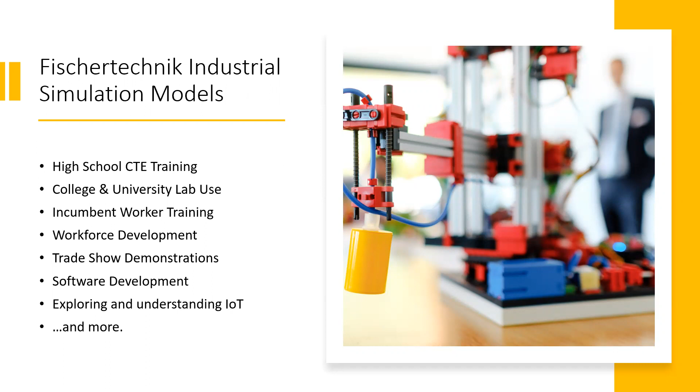Now, whether you're an educator at the high school level, let's say involved in something like CTE training, if you're maybe a college professor or an industrial trainer, teaching programming skills required in manufacturing, maybe you're with a company looking for ways to demonstrate your software-based solutions, or you're just looking for ways to make IoT-related concepts easier to understand to employees or customers. In any of these instances, I believe this presentation is going to offer some important options for you to consider.

And we're going to start off by considering the skills gap. Now, if you've attended any of our other Fischertechnik education webinars, you've probably heard me talk about the importance of STEM education. And of course, STEM's an acronym which stands for science, technology, engineering, mathematics, and it really goes without saying that STEM education has been perhaps the most discussed topic in education over the last decade.

Now, as most of us are aware, the push for developing STEM skills in students is in large part to help to best prepare them to take their place in the modern workforce. Not so long ago, when our parents or our grandparents were entering the workforce, employers in areas such as manufacturing might have been satisfied with hiring workers who could demonstrate good motor skills and a solid work ethic. But as manufacturing becomes more and more dependent upon automated processes and robotic control, employers now desperately need individuals who have a background in areas such as mechatronics, industrial electricity, mechanical components, and programming PLCs.

And as it ties in directly with the solutions we're going to be looking at in this presentation, I'm going to stop and consider that last skill area that I just touched upon, that of being a PLC programmer. First off, in case you're not familiar, PLC is an acronym, the letters of which stand for Programmable Logic Controller. And essentially, a programmable logic controller, or a PLC, is a very specialized computer that's used to control the types of machines and automated processes that are typically found in an industrial setting. And these are, of course, going to be things like an automated manufacturing plant, for example.

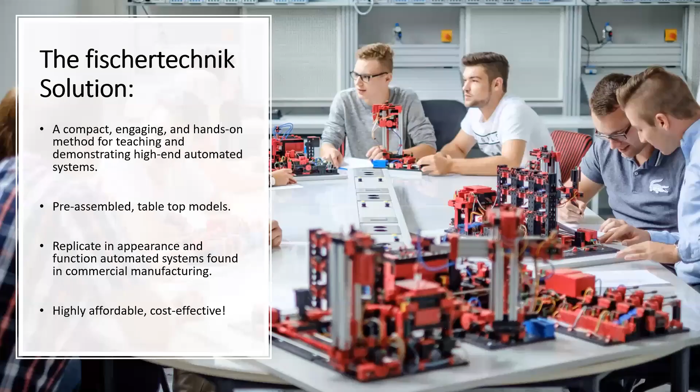And that brings us to the line of Fischertechnik industrial simulation and training models. Now, these models have been designed with the intent of providing a compact, engaging, and hands-on method for teaching and demonstrating high-end automated systems. The line consists of a series of pre-assembled small scale models which are designed to replicate in both appearance and function various automated robotic machines and systems that are commonly found in commercial manufacturing.

So, before we get deeper into the models, let me provide you with a little bit of background on what Fischertechnik is all about. Fischertechnik has been creating tools for teaching students of all ages how technology works for well over 50 years now, based around their unique building system. Now, what makes their building system unique is that unlike other popular construction systems where the components are designed to simply stack, the Fischertechnik system was created with more of an engineering mindset.

The core building block in the system is designed to enable attachment from all six sides, and because of this, it allows for almost limitless design possibilities. Many of the parts are designed to slide together and lock in place using a tongue and groove assembly method. And the hundreds of different parts available will also help to address very specific design needs.

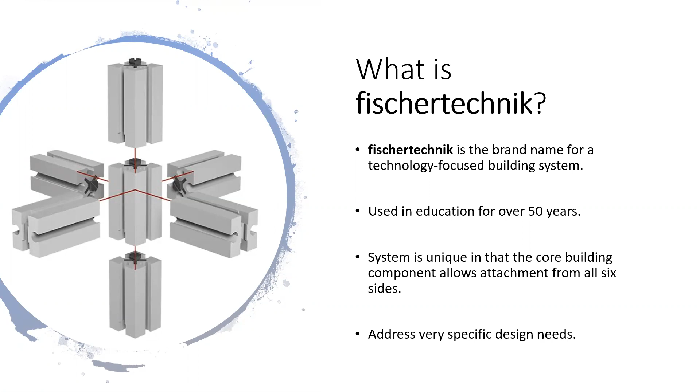The system was created back in the 1960s by German inventor Arthur Fischer, who's noted for countless innovations used in both the construction and the automotive industries. Now, Mr. Fischer, at the time of his death back in 2016, held more patents in his name than Thomas Alva Edison had amassed during his own lifetime.

Now, besides Fischertechnik, Mr. Fischer was the inventor of synchronized flash photography, and that was back in 1949. And he's also credited as the creator of the expanding nylon wall plug, which is commonly used in conjunction with a screw or a bolt to help anchor heavy objects to walls.

His company, the Fischer Group, employs thousands of workers worldwide, producing many variations of fastening devices that are used in building construction. And they also produce numerous components that are used in the automobile assembly process, as well as providing consulting services to companies who wish to employ state of the art manufacturing processes.

Now, once again, the focus of Fischertechnik sets, whether those intended for the retail market or those that are designed specifically for classroom use, in either case, the focus has always been on helping to foster an understanding of technology and how things work. Now, many of the products offered by Fischertechnik for the education sector are what we call subject specific sets, focusing on different STEM related areas such as mechanics, pneumatics, robotics, renewable energy, and other such topics.

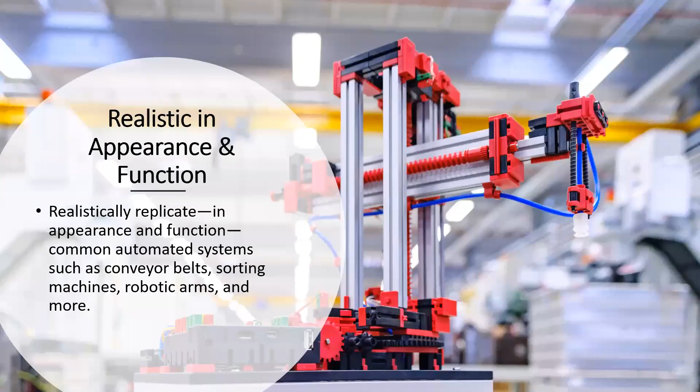First, Fischertechnik simulation solutions allow educators to offer engaging, hands-on tools for teaching, exploring, and understanding various aspects of automation and programming. Now, this could be for understanding how automated systems work, or for having a tangible physical system to observe and work with in a programming or PLC-focused learning environment. The models are also, again, designed to realistically replicate in both appearance and function common automated systems, things such as conveyor belts, sorting machines, robotic arms, and more.

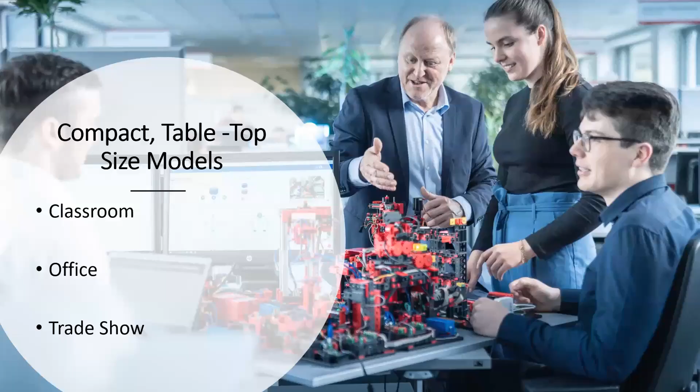Now, because the models are compact, in most cases tabletop sized models, they are not only ideal for use in the classroom or for in-office demonstrations, but also for demonstrating software or other technology-based offerings in a trade show environment. The next factor is quality. Each Fischertechnik simulation model is a hand-assembled, high quality German-made product.

Each of these models is available in a 24-volt version designed specifically for use with industry standard PLCs. Now, it doesn't matter whether you prefer, let's say, Allen Bradley controllers, Siemens controllers, or if you use controllers from manufacturers such as Honeywell, Mitsubishi, General Electric. You could, of course, name many others. You can control the 24-volt versions of the simulation models with the PLC you prefer.

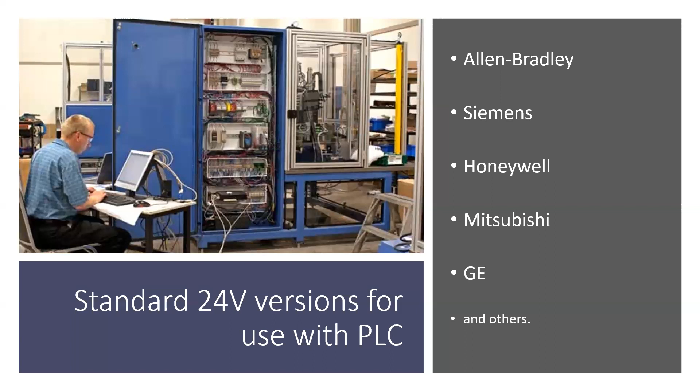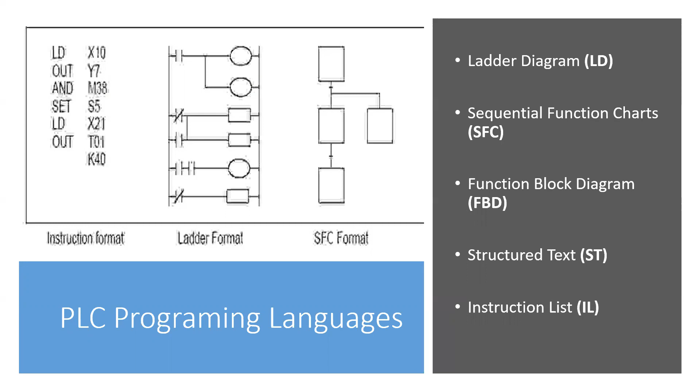But for those who are non-industrial users or for educators who aren't versed in or focusing on PLC programming, there are several models which are available in 9-volt variations. In the case of these 9-volt variations, they ship pre-wired to Fischertechnik's own proprietary robotic controller, which is the Robotics TXT controller. In this case, it's the newly upgraded TXT 4.0. And each of these controllers is pre-programmed using Fischertechnik's own RoboPro graphic programming software.

Now, when we're talking about the 9-volt versions, the only additional component that will be required will be the addition of one or more 9-volt power adapters as specified with each model. Otherwise, in most cases, these 9-volt versions should be ready to use out of the box.

Now, if you're involved in demonstrating or exploring IoT, also known as the Internet of Things, besides the fact that many end users have adapted some of the models in the primary line of simulation and training solutions for IoT purposes, Fischertechnik now also offers a special IoT-focused version of the factory simulation model, which is designed specifically for exploring and understanding cloud control and what is often referred to as Industry 4.0.

Now, in the case of this model, it's designed to be both controlled and monitored from a special web-based dashboard. And we are, of course, going to look at this in more detail a little bit later in the presentation.

Finishing up our advantages, finally, the Fischertechnik simulation models are cost-effective. Now, if you've had the opportunity to look into any of the other hardware-based industrial simulation options that are available in the marketplace, you'll probably notice pretty quickly that the entry point for many of these products can easily be $20,000 to $30,000 or even much more. Fischertechnik simulation solutions, on the other hand, are available at just a fraction of that price, as well as, again, being compact, realistic, and high-quality learning and demonstration tools.

So on that note, we're going to jump right into our review of the models. And we're going to start off with the vacuum gripper robot. Now, what you're going to see in this video is the vacuum gripper being a 3-axis robotic model with a vacuum gripping device. The model you're going to see is designed to precisely pick up and position workpieces in 3-dimensional space. The model itself includes 3 encoder motors, 3 push-button limit switches, a vacuum suction device, a compressor, which is the blue brick component that you see in the video, and a solenoid valve.

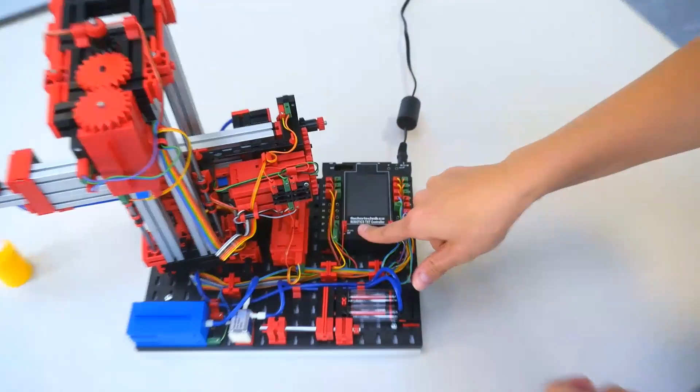The dimensions of the model are approximately 9 by 19 by 15 inches, and it has a weight of only about 7 pounds. The 24-volt version of this model, as well as all of the first 5 24-volt models we're going to be looking at today, each have a relay board for motor polarity reversal and both a multi-pin connector with 34 pins and a grid of 2.54 millimeters, as well as additional PCB terminals with push-in connections for all inputs and outputs.

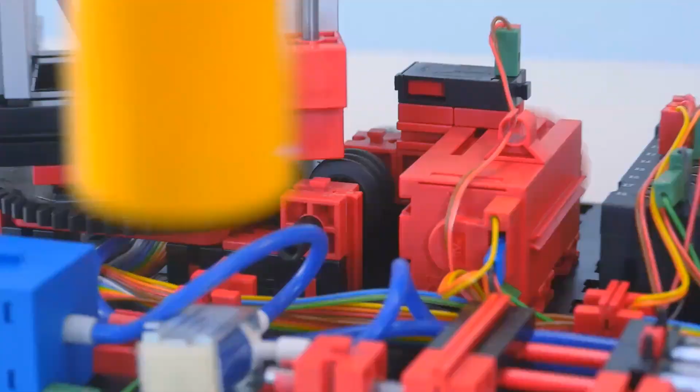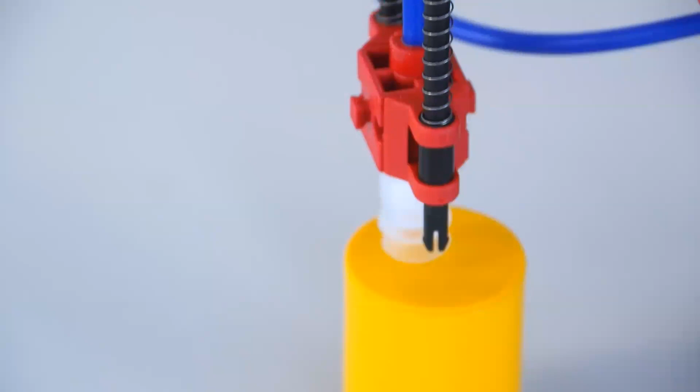Again, this 24-volt model, as with all of the 24-volt versions we're going to look at, will require you, the end user, to provide the PLC and the programming, the wiring from the PLC to the model, and so on. I will also mention that for this and for all of the models we're going to look at today, the specs are also detailed in the product listings found on the Studica website, as well as in our product brochure, which I will provide information on obtaining at the end of this presentation. I'm just going to let this play out for another second or two.

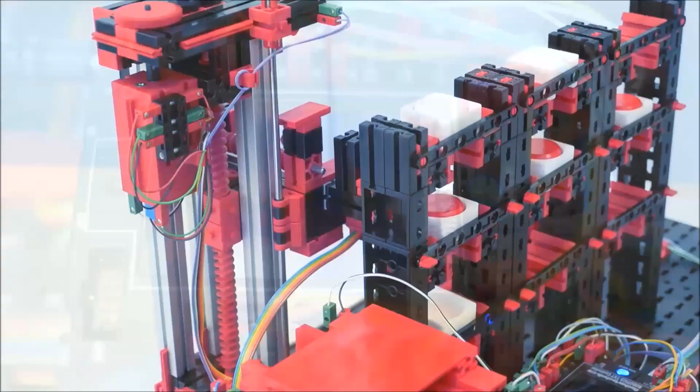And there we go. Next model we're looking at is the automated high bay warehouse. The model you're going to see here features a transfer station with a conveyor belt, along with a shelf stacking mechanism for storing and retrieving workpiece carrier trays, along with 9 individual storage spots. Components on the model include 2 encoder motors, 2 mini motors, 4 push-button limit switches, 2 photo transistors, 2 LED light barriers, and a selection of different colored workpieces along with carrier trays for each piece.

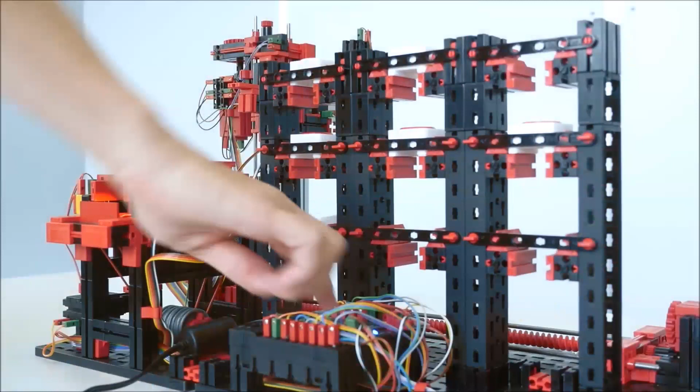I will mention that this particular model is a favorite among educators that I've spoken with who teach programming. And the reason for that is because it gives you a lot to work with in regards to the movements of the picker mechanism, as well as the precision required to properly store and retrieve each of these workpieces, each step of which, of course, requires very specific coding. So because of that, they like the detail that's involved. The dimensions for this model are approximately 19 by 28.5 by 15 inches, and it has a total weight of about 18 pounds.

Again, the 24-volt version has a relay board for motor polarity reversal and both the multi-pin connector with 34 pins and a grid of 2.54 millimeters, as well as additional PCB terminals with push-in connections for all inputs and outputs. Again, you do need to provide your own PLC and programming. And there is a limited edition 9-volt version also available at this time. Again, pre-wired to the pre-programmed TXT controller, and 1 9-volt power adapter is required for that.

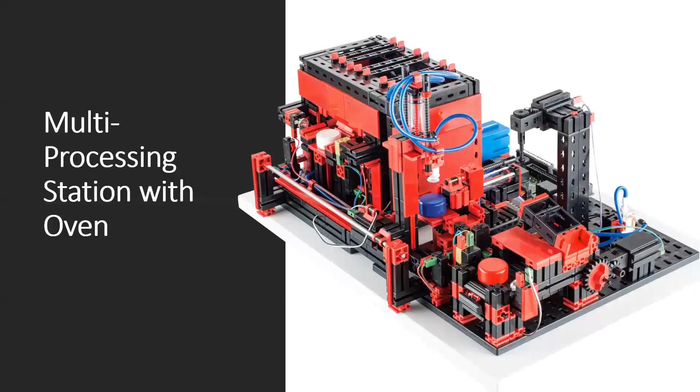The next model we're looking at is the multi-processing station with the oven. And what we're going to see here is a model featuring a furnace simulation with a pneumatic sliding door.

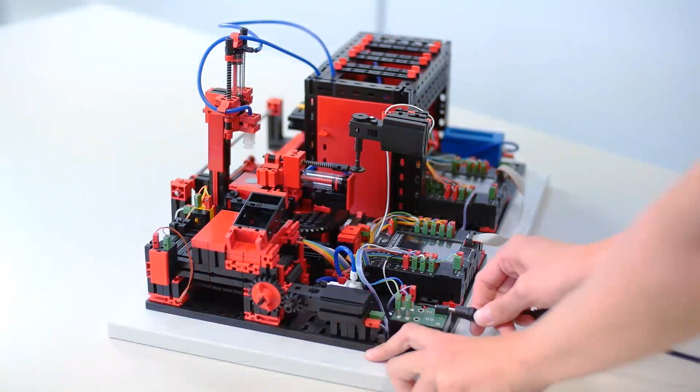There's a downstream processing station with a pneumatic transfer unit that includes a vacuum gripper, a cutter with a rotary table, and a conveyor belt. Components used on this model include 4 mini motors, 6 push-button limit switches, 2 photo transistors, 2 LED light barriers, 4 solenoid valves, and a compressor.

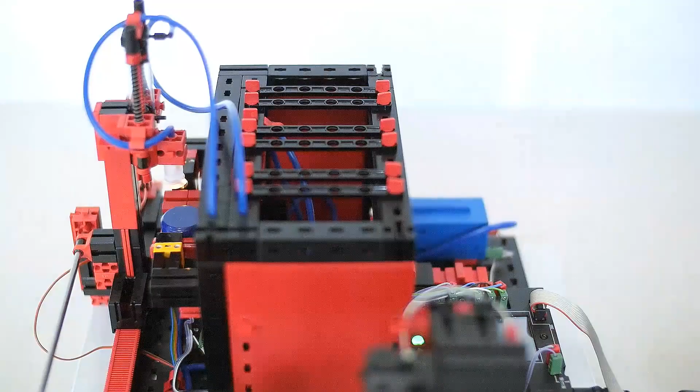The dimensions on the model are approximately 20 by 14 by 12 inches, and it has a weight of just about 11 pounds. And again, the standard version of this model is the 24-volt version for use with the PLC of your choice, with once again a relay board for motor polarity reversal and both a multi-pin connector, again 34 pins with a grid of 2.54 millimeter, as well as additional PCB terminals with push-in connections for all inputs and outputs. And the limited edition 9-volt version in this case is connected to 2 ROBOTICS TXT controllers. So in that case, 2 9-volt power adapters will be required for all operations.

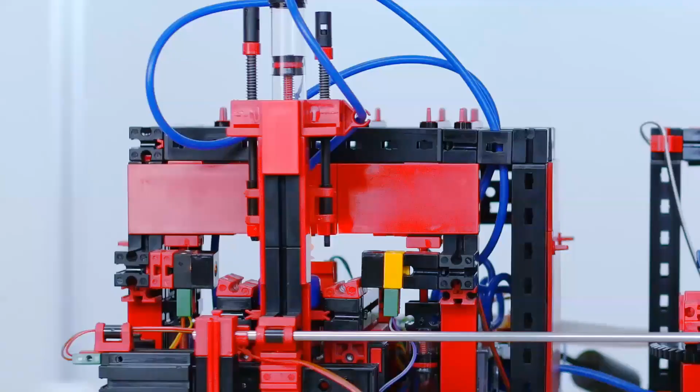And there we go. So next up in our presentation is the sorting line with color detection. Okay, where'd we go? We're going to silence that.

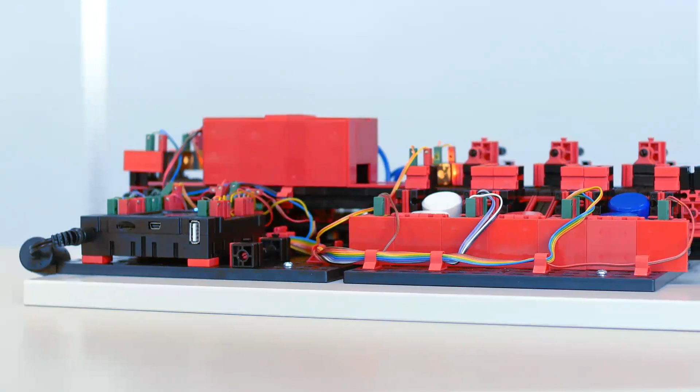Now, the simulation model you're going to see here features a system for detecting workpieces of different colors, and it sorts them via conveyor belt into 3 different storage bins. Components on this model include 2 mini motors, 5 photo transistors, 5 LED light barriers, 3 solenoid valves, a compressor, and an optical color sensor.

The dimensions on the model are approximately 20 by 14 by 12 inches, and it has a weight of just about 10 pounds. Now, as with the models we've looked at before, the standard 24-volt version again has the relay board for motor polarity reversal. And again, the multi-pin connector, 34 pins, grid of 2.54 millimeters, as well as the additional PCB terminals with push-in connections for all inputs and outputs. And again, you do need to provide the PLC and the program.

And there is a limited edition 9-volt version, which comes pre-wired to the pre-programmed robotics TXT controller, and in that case, 1 power adapter is required. We'll just let this sort through the pieces.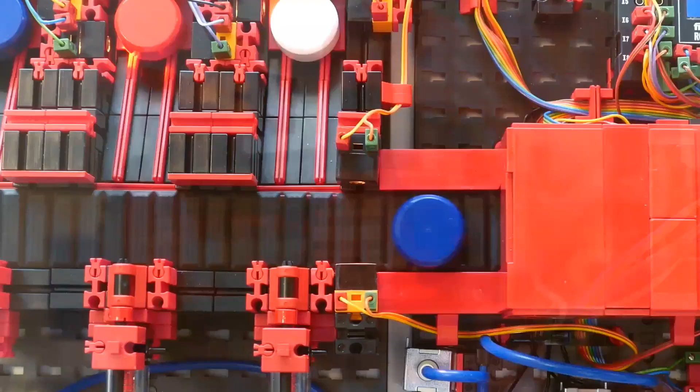The next model we're looking at is the factory simulation, which combines the 4 models that we've just reviewed. Again, the vacuum gripper robot, the automated high bay warehouse, the multi-processing station with the oven, and the sorting line with color detection, combining them all into one self-contained material cycle. The cycle you're going to see works like this.

Work pieces are retrieved from the automated high bay warehouse using the vacuum gripper robot, and then they're moved to the multi-processing station with the oven. And after the workpiece has been processed by the multi-processing station, it's then sorted by color in the sorting line with color detection before being again moved by the vacuum gripper robot back to the automated high bay warehouse for storage.

Now, as we've already discussed the components of each model previously, I'm not going to belabor that by restating that here, but what I do want to impress upon you are the dimensions of the model as a whole. Now, as it combines these 4 individual models into one cycle, it does have a much larger footprint, as you see. In this case, it's approximately 39 by 31 by 16 inches, and the weight is between 43 and 46 pounds, depending upon whether we're talking about the 24-volt version or the limited edition 9-volt version.

Now, due to these dimensions, please note that this factory simulation and any of the factory simulations we're going to be looking at today, we'll be looking at several later, do need to all be shipped flat as freight, and they will ship on a pallet. So this is going to be truck shipping. I also want to point out that as the factory simulation models do tend to be in higher demand, especially during the summer, please anticipate a possible turnaround time of up to 2 to 3 weeks prior to any order for this model leaving our warehouse.

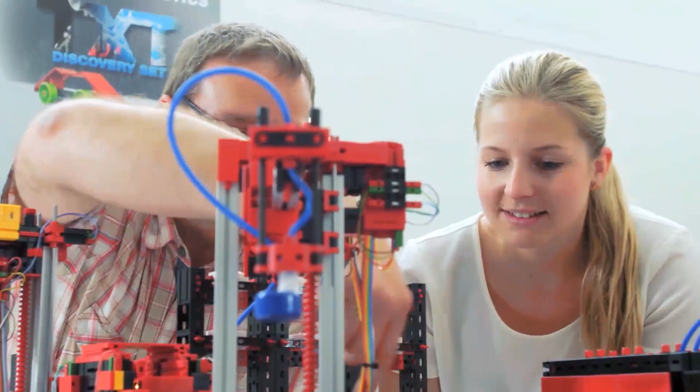Now, a few things to note. First off, this is currently available in the standard 24-volt version and in very limited quantities in the 9-volt version. Now, in the instance of the 9-volt version, it is wired to 5 robotics TXT controllers, and because it's got 5 controllers that happen to be daisy chained, you will need 3 power adapters with this. Again, as always, the 24-volt version will require the end user to provide the PLCs, the programming, and any other hardware that's required.

Now, before we move on to the next group of models, I do want to mention that there is a storage option available for those users of either of the 2 factory simulations we've just discussed who will need to transport the model or who want to protect it when in use. Now, in this case, the travel case consists of an aluminum case maker profile with plastic plates and steel ball corners, as well as 4 steel tilt handles and angle protection corners.

The upper section of the case is partially lined with soft foam blocks in different heights to help cushion the model, and it also has 3 internal zipper pockets for storing cables and other accessories. The lower portion of the case is lined with hard foam, and it's designed so that once the top of the travel case is removed, the model can remain in the bottom section of the case and be fully functional. The case has exterior dimensions of approximately 41 by 33 and 7 by 17 inches, and it has a weight of about 53 pounds.

And please note that when using the travel case, these models still need to be shipped flat. So even though we have the travel cases sitting on their side, you would want to ship this flat or store it flat. And I will mention that this can be used also for the Training Factory Industry 4.0 models that we're going to examine a little bit later in the presentation.

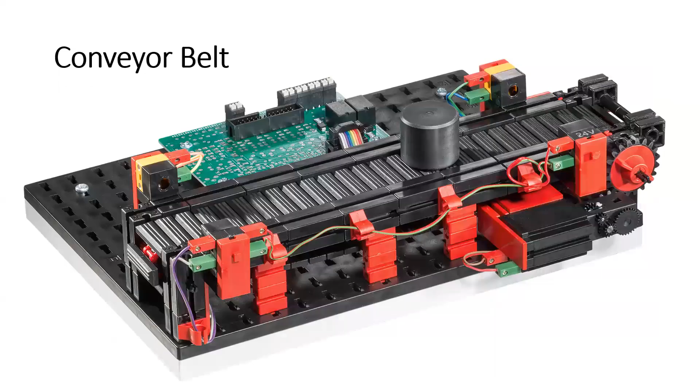But moving right along for now, we're going to look at the conveyor belt. It's a basic conveyor belt with a length of 275 millimeters that is used to transport work pieces with a diameter of up to 29 millimeters. You could connect multiple conveyors to increase the length of transport as desired. That can be easily done with a few extra Fischertechnik pieces. Components on this model include an encoder motor, a push-button limit switch, 2 phototransistors, and 2 LED light barriers. Dimensions are approximately 14 by 10 by 4 inches, and it has a weight of about 2 pounds.

As we stated before, the standard 24-volt variation includes a multi-pin connector, but in this case, it's a little bit different. It's 26 pins with a 2.54 millimeter grid as seen here. And for a limited time, we still do offer 9-volt versions of this pre-wired to the robotics TXT controller as shown here. And in this case, one 9-volt power adapter is required for operation.

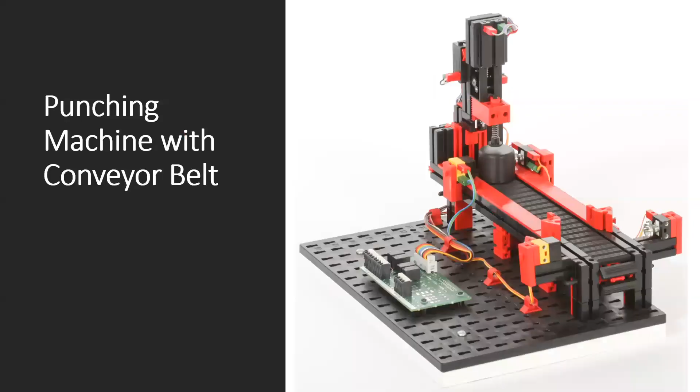The next model is a variation of the conveyor belt that makes it into a punching machine. This basically is the same conveyor we looked at, except this time you have a machining station built on. Components on this model include 2 encoder motors, 2 push-button limit switches, 2 phototransistors, and 2 LED light barriers. The dimensions are 15 by 12 by 7.5 inches with a weight of about 3.5 pounds. Again, it's available in the standard 24-volt variation, again with the 26-pin connector and the 2.54 millimeter grid, as shown in this picture. And we do have a 9-volt version wired to the robotics TXT controller, which again requires 1 power adapter.

The next model is the indexed line with 2 machining stations. This model features a U-shaped conveyor line consisting of a milling and a drilling station and 4 conveyor belt sections. Components on this model include the 4 conveyor belts I just mentioned, 8 encoder motors, 4 push-button limit switches, 5 phototransistors, and 5 LED light barriers. The dimensions of the model are approximately 19 by 18 by 11 inches, and it has a weight of just about 8 pounds.

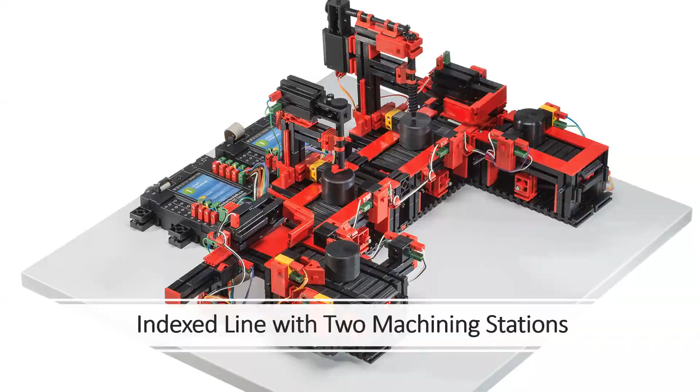Again, it's available in both the standard 24-volt version with the 26-pin connector and a 2.54 millimeter grid for use with your PLCs, and it does have a 9-volt version wired to the pre-programmed robotics TXT controller, and this will require one 9-volt power adapter.

The next variation is on the idea of a pick-and-place robot, the 3D or 3-axis robot. Now, the 3-axis robot has gripping forceps, which it uses to help it quickly and precisely position the work pieces it picks up in 3-dimensional space. The degrees of freedom for this robotic arm are as follows. Axis 1 turns 180 degrees. Axis 2 can move forward or backward 90 millimeters, and axis 3 can raise or lower 150 millimeters.

Components on this model include 2 axis motors, 2 encoder motors, and 4 push-button limit switches. The dimensions are approximately 19 by 16 by 9 inches, and it has a weight of just about 6 pounds.

And again, this comes in either a 24-volt version with the 26-pin connector and 2.54 millimeter grid designed for use with the PLC programming of your choice, or in a 9-volt version, which in this case is not a limited availability model. This is a regular Fischertechnik model. It's a standard model, and it does come pre-wired to the robotics TXT controller and requires 1 power adapter with that.

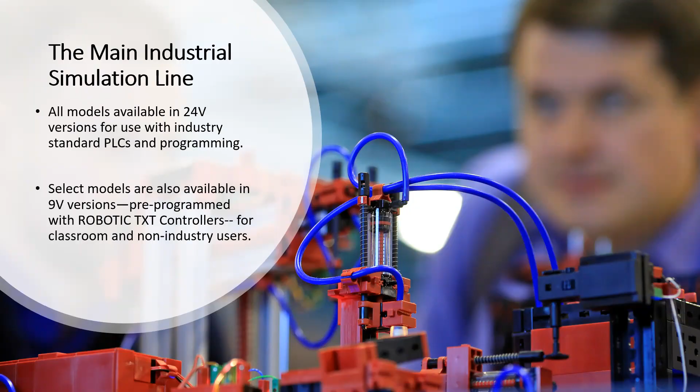Now that's the first 9 variations of simulation models, the main industrial simulation line. The next grouping of simulation models that we're going to be looking at focus specifically on the area of IoT, and they're designed for demonstrating and teaching about cloud-based monitoring and control. And these models go under the umbrella name of Training Factory Industry 4.0, and they are available in both a 24-volt version for use with PLC, and there's also a 9-volt variation for classroom and demonstration purposes.

Now, these models have been designed to help address how the recent changes in industrial production, driven by digitization, have created a need for stronger networking and more relevant information on all production levels. Now, with this Industry 4.0 update of the factory simulation model that we looked at earlier, such digitization activities can be simulated, learned, and applied on a smaller scale before, of course, they're implemented on a larger scale. Now, as the following video showcasing the 24-volt version provides a nicely narrated overview of all the features and exactly how the factory works, I'm going to step back for a moment and allow you to watch and listen to the narrator.

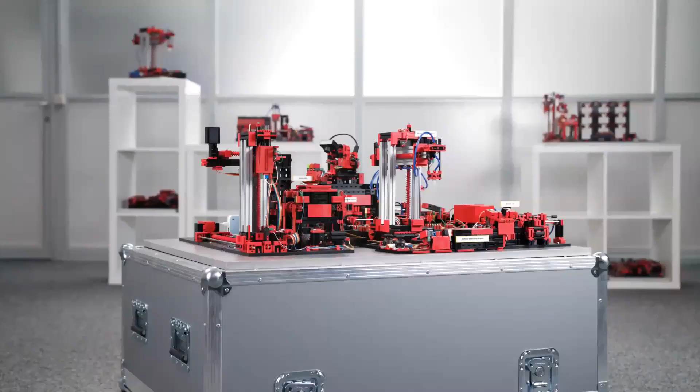So just to summarize some of the points that were touched upon, with the Training Factory Industry 4.0, you can do training and simulation on a realistic production model. You have in-depth learning through haptic comprehension, optical and sensory applications, digital traceability with NFC/RFID technology, customized production in lot size 1, integrated cloud connection and control via smart devices, using and operating dashboards, web-based remote maintenance. You have the linking of production materials planning data, and connection of upstream and downstream logistics processes.

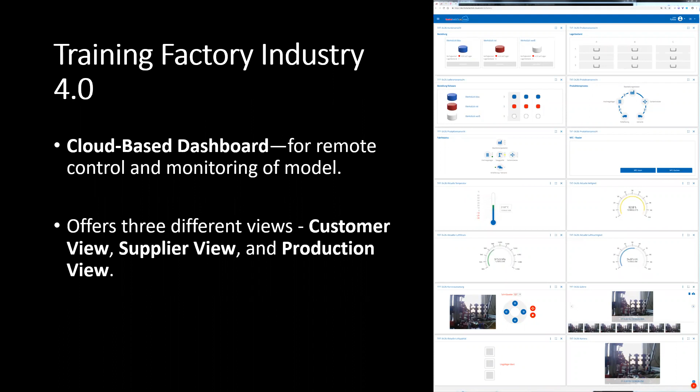Now, as you just saw, the model incorporates many features not found in the models that we looked at earlier, besides most notably being the use of the cloud-based dashboard for monitoring and controlling the model. Now, some other examples of things that are unique to these models would be the camera that's used for visually monitoring the factory functions from the cloud-based dashboard, as well as the environmental sensor, which collects data on variables such as temperature, air quality, humidity, and air pressure.

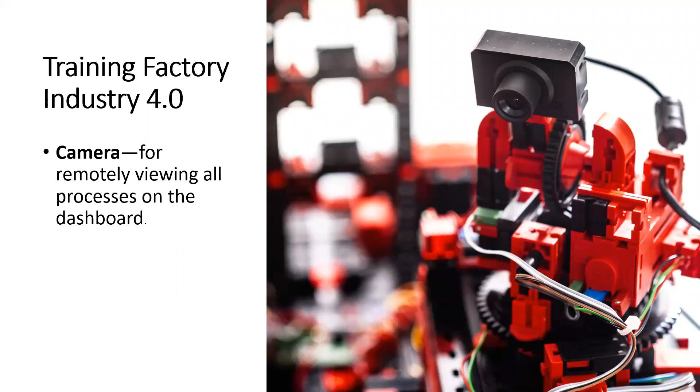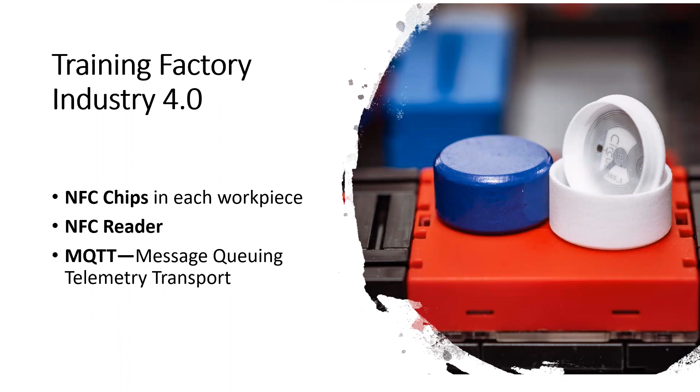The use of NFC chips in each individual workpiece, each of which has a unique identification number, enables the positions of each workpiece in the work cycle to be mapped. And the use of MQTT, or message queuing telemetry transport, allows the networked TXT controllers to communicate with one another. Now, as there are two variations of this model, let's go over what makes them different, aside, of course, from the voltage requirements. And we're going to begin by focusing on the 24-volt version and what makes it unique.

Now, first off, it is a bit of a hybrid in that while requiring a PLC for operation and control, it does also incorporate one Fischertechnik robotics TXT controller. And in this case, the TXT controller serves as the MQTT broker and interface to the Fischertechnik cloud. Communications between the PLC and the TXT controller is carried out using an IoT gateway via OPC UA. Now, OPC UA, also known as OPC Unified Architecture, is a standard for exchanging data across different platforms.

In addition to the TXT controller that's used here, there is also an IoT gateway using Raspberry Pi with Node-RED. And this allows the option for not only presenting and using data on a dashboard in the Fischertechnik cloud, but also being able to display data and calibrate the stations of the factory in a Node-RED dashboard.

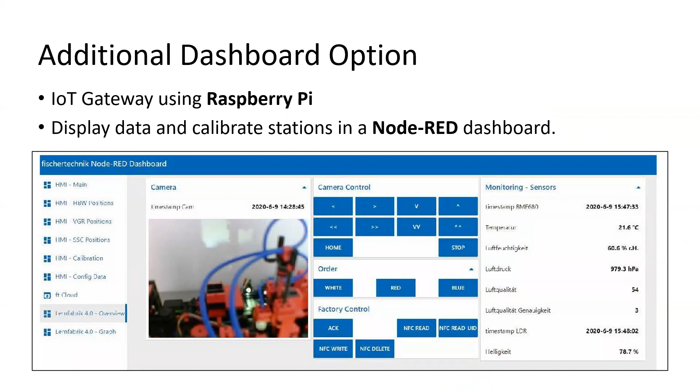The model also incorporates newly developed 24-volt adapter boards to interface to the PLC. These, of course, ship as part of the assembled training factory, and are connected to the PLC via terminals. Now, among other things, the latest generation of adapter boards allows the speed of the encoder motors to be controlled via PWM, or pulse width modulation.

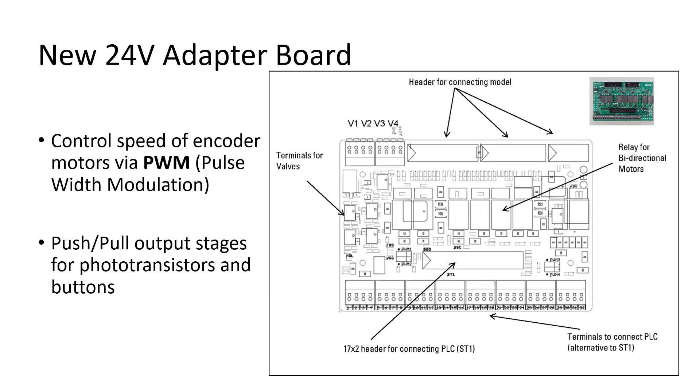And they also have push-pull output stages for phototransistors and for buttons. And finally, one of the most important new features. Now, unlike any of the other 24-volt models that we looked at earlier today, the new 24-volt Training Factory Industry 4.0 models also include access to a sample program. In this case, the program itself is in structured text format, and it was created around a Siemens S7 1500 PLC. And this program is available for download on GitHub.

Now, of course, the new Training Factory can also be controlled with other PLC models besides the Siemens brand once the end user makes some small adjustments to the sample program. And for anyone who wants to do that, the source codes needed are also available for download on GitHub. Now, as with the first of the 24-volt models we looked at today, the Training Factory Industry 4.0 has the relay board for motor polarity reversal and both the multi-pin connector, again, 34 pins with a grid of 2.54 millimeters, along with PCB terminals for pushing connections for all inputs and outputs.

And again, all this information and much more is included in the materials that you can download right from the Fischertechnik or the Studica website, including the 152-page PDF manual that accompanies this. And of course, if you need access to that, you can also connect with me at the end of this presentation. You'll have information on doing that.

Now, in the case of the 9-volt version, the control is facilitated through the use of 6 robotics TXT controllers. Now, unlike all the other 9-volt versions we've looked at previously today, these are programmed not using RoboPro, but in this case, using C, C++. Again, all of the programming is preloaded so that once connections to the internet and the cloud-based dashboard are made, all of which is clearly outlined in the downloadable documentation PDF that accompanies this model, once you've done that, you should be able to get started pretty quickly.

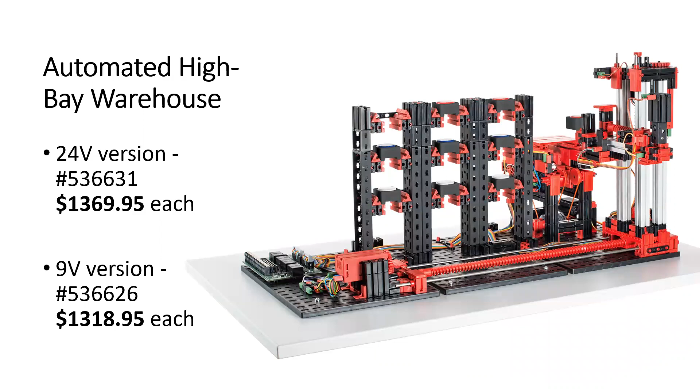So, how much do these models cost? So, at this point, we're going to do a quick review of all the models I've discussed, along with the pricing for each of the options. First up, the vacuum gripper robot. This is only available in the 24-volt version for use with PLC. Requires the PLC, of course. And you're looking at $1,129.95 list price for that. The automated high bay warehouse in the 24-volt version is $1,369.95. In the 9-volt version with the TXT controller is $1,318.95. That is limited. The multi-processing station with oven in the 24-volt version is $1,199.95. The 9-volt version is $1,479.95. That comes with the TXT, of course.

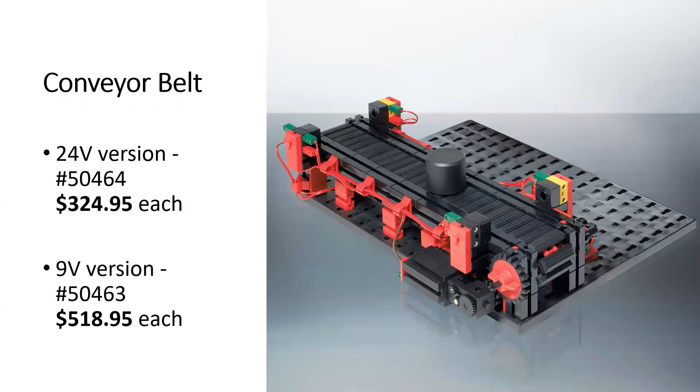The sorting line with color detection in the 24-volt version is $1,049.95. In the 9-volt version is $1,128.95. The factory simulation, this is the standard factory simulation, the non-IoT version. The 24-volt version is $4,829.95. And the 9-volt version with all the TXT controllers is $5,239. The conveyor belt in the 24-volt version is $324.95. In the 9-volt version, it is $518.95, and that, of course, comes with the TXT. The punching machine with conveyor belt, 24-volt version is $419.95, and the 9-volt version is

$599.95. The 3D robot, 3-axis robot, these are both standard versions that are available consistently. The 24-volt version is $999.95 list price. The 9-volt version is $1,369.95. The index line with 2 machining stations in the 24-volt version is $1,129.95. And the 9-volt version is $1,394.95.

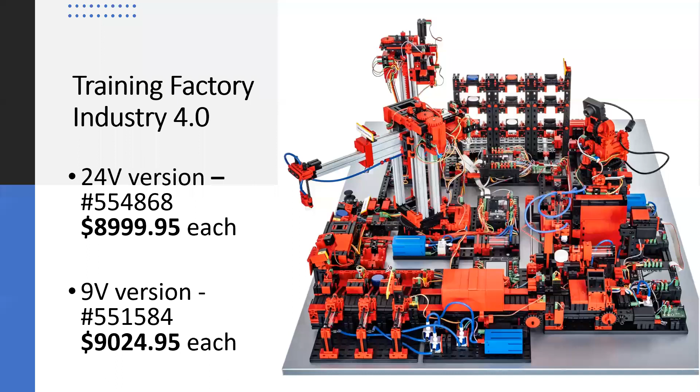And the Training Factory Industry 4.0 for exploring and understanding IoT-related activities. In the 24-volt version, you are looking at a cost of $8,999.95. And in the 9-volt version, you're looking at a cost of $9,024.95. But there are 2 other versions that are also available.

The new Training Factory Industry 4.0 24-volt version with a PLC connector. So what this version would include is the PLC connector board and the wiring, which normally requires a lot of extra work on the end user's part. So the wiring from the model to the PLC connector board is also included with the PLC connector board. The cost for that model is

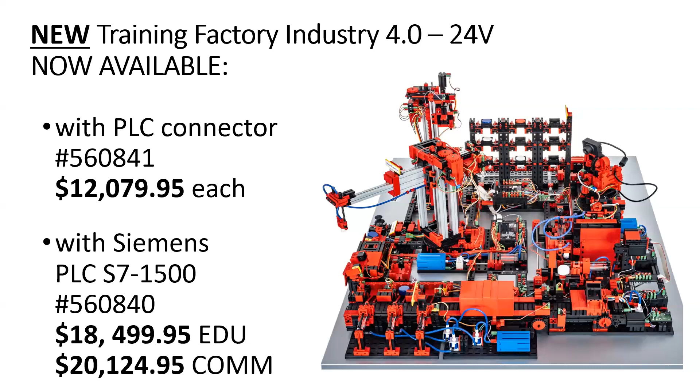$12,079.95. And then there is another version that includes everything, including the Siemens PLC, the S7 1500, and of course, all of these Training Factory models have access to that sample program in structured text format that comes with this. But in any case, the educational version of the model with the PLC is $18,499.95. And the commercial version of that is $20,124.95.

2 other items to mention here. The power adapters, 9-volt power adapters, are $12.99 each. The travel and storage case, which is used for all the factory simulation and Training Factory Industry 4.0 models, is $1,524.95 each.

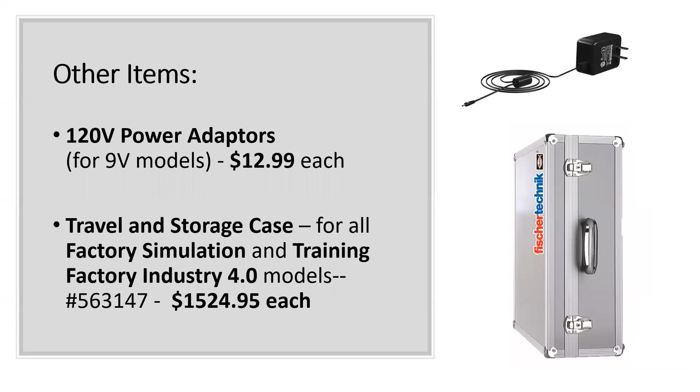And there is breaking news. There is a brand new model called Quality Control with AI. And the Quality Control with AI system model from Fischertechnik is ideal for visualizing this complex subject matter in a hands-on fashion, as it creates a sustainable learning experience by linking theory and practice. Processes can be sped up, fault rates and costs minimized, and fault evaluation standardized.

And the Fischertechnik sorting line here comes with workpieces in 3 different colors. And these workpieces are marked with 3 processing characteristics, as well as 3 different fault patterns. Now, in this case, the workpieces are scanned by the camera and classified with the aid of trained AI. Depending on the color, the feature, and the fault pattern, the workpieces are then sorted by the artificial intelligence on the basis of their quality features.

The AI used is realized with machine learning in TensorFlow, where an artificial neural network was trained with image data. The learned AI is executed on the Fischertechnik TXT 4.0 controller, and the model sequence control is implemented in the RoboPro Coding programming environment and in Python. Now, if you want to go a step further, you do have the option of generating your own AI applications as well, and the training for this is done in Python, for which a suitable example project is provided for explanation and for examination.

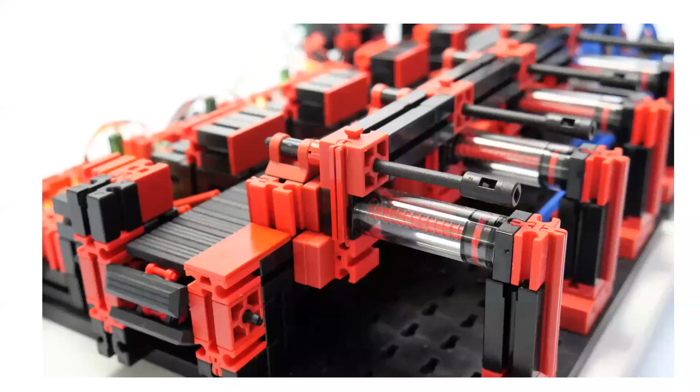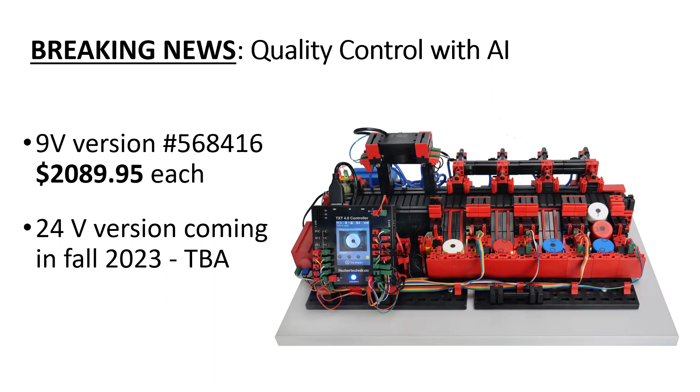Now, these are just coming in now. We're awaiting the first shipment of these later this week. Here's some more photos. As you see, that's the new 4.0 controller on there. And right now, it is only available in a 9-volt version. You're looking at a cost of $2,089.95 each for those. The 24-volt version is not yet available, but we are looking at a potential release date of fall 2023. So that was just kind of added in there. That has just become available.